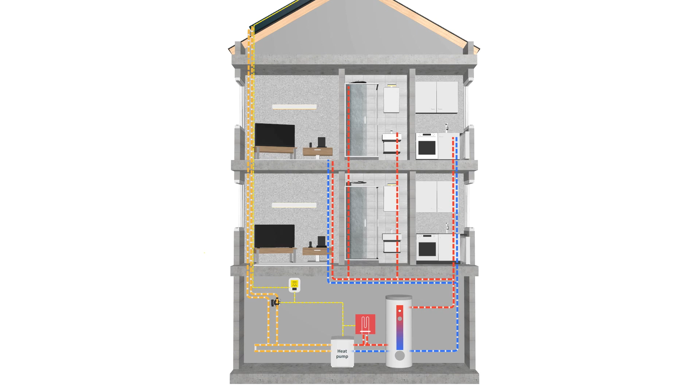The combination of geothermal heat sources with PVT collectors in heat pump systems achieves a variety of benefits. For example, the heat source with the higher temperature is always used throughout the year, which increases the efficiency of the heat pump. The borehole field is used at night in winter because it has a higher temperature.

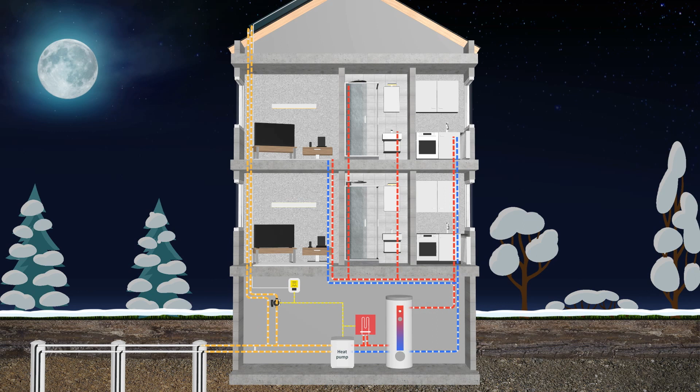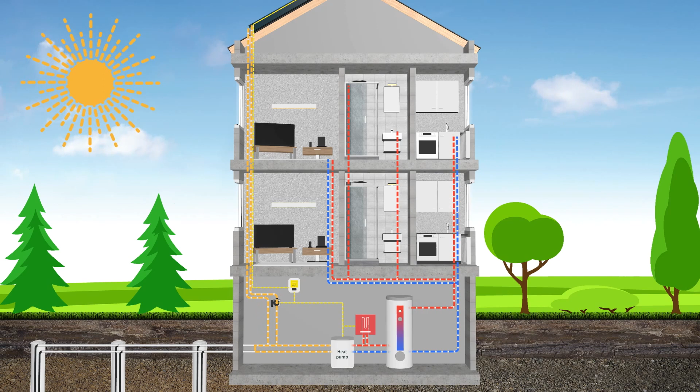Snow on the panels can also be melted via the thermal circuit of the PVT collectors. When the sun is shining, the PVT collectors can increase the temperature and reduce the load on the borehole field. For a large part of the year, the PVT collectors can even provide all of the necessary environmental heat for the heat pump. In summer, the PVT collectors regenerate the ground, preventing it from cooling down over the years.

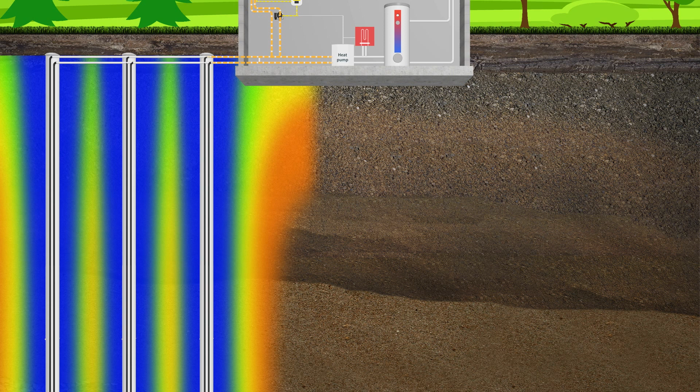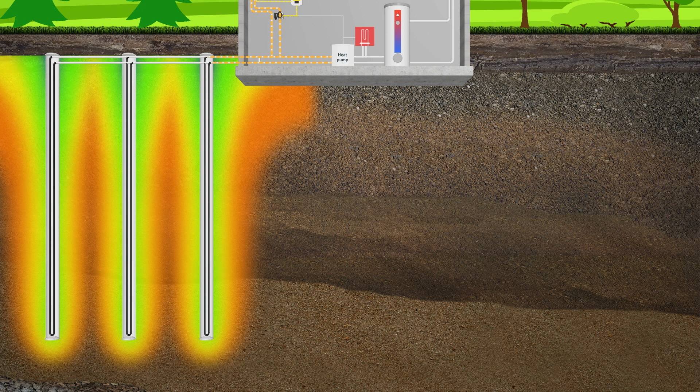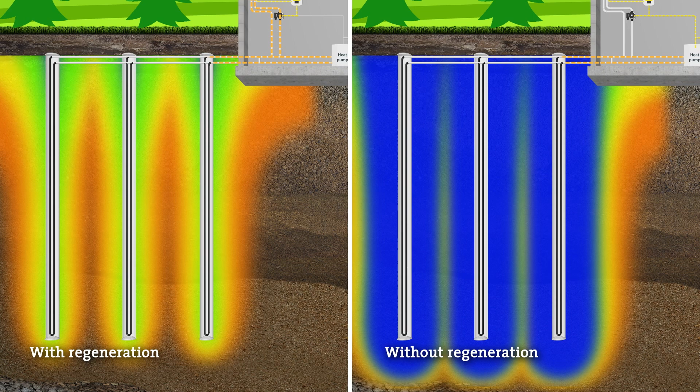Because of the regeneration, the borehole field can be more compact, and fewer holes need to be drilled or can be drilled less deeply. The soil around the borehole remains warmer and therefore does not interfere with boreholes on the neighbouring property. In addition, regeneration cools the PVT collectors in summer and increases the solar electricity yield.

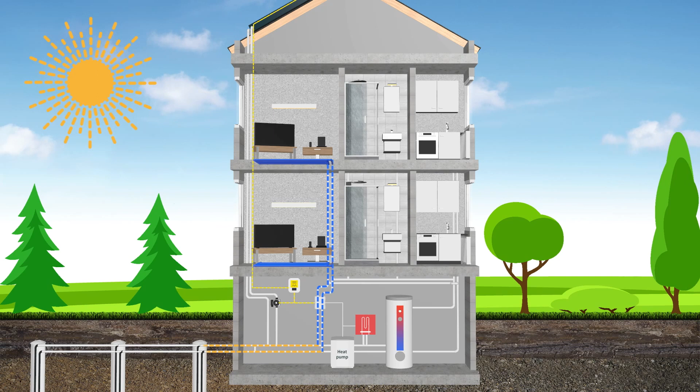Passive cooling of the building also remains possible. Here, fluid from the ground is circulated via a heat exchanger to cool down the underfloor heating. At night, the building can also be cooled through the PVT collectors. Various geothermal heat sources are suitable for this combination.

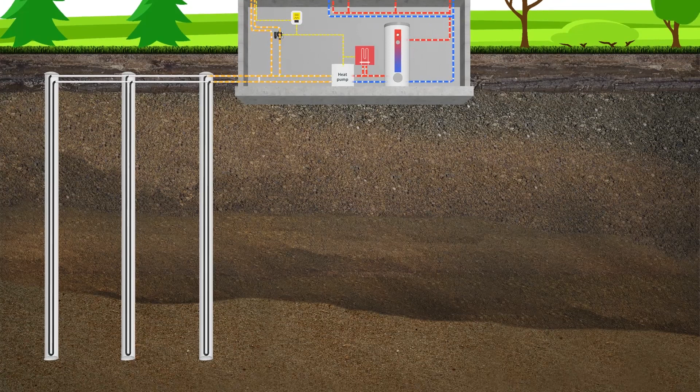The combination of geothermal heat sources with PVT collectors in heat pump systems achieves a variety of benefits: maintaining the efficiency of ground heat sources, downsizing of the ground heat source due to discharge and active regeneration, cooling the PV modules and increasing the solar electricity yield, and passive or active cooling of the building is possible.

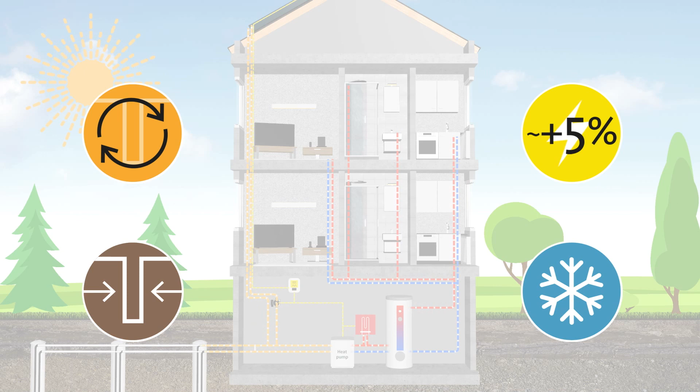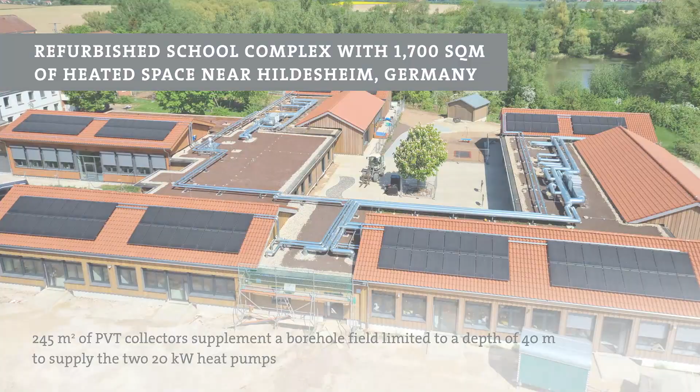Numerous projects have already successfully combined PVT collectors with geothermal energy sources for even more efficient, emission-free energy generation for heating and cooling.